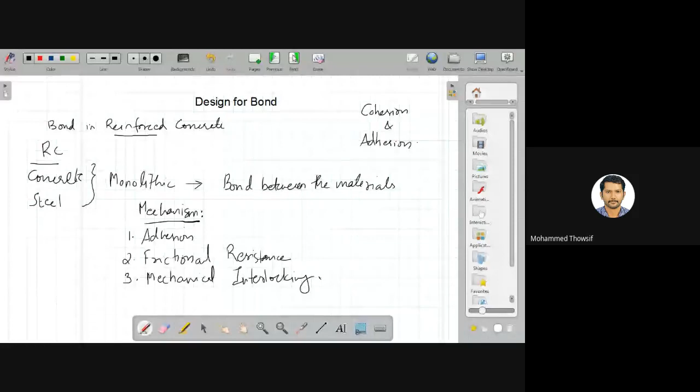So in order to go into the concept more, we will take an example of a cantilever beam. You can see the cantilever beam over here. You are having a fixed support. So this is a fixed end to which your beam is supported, and it is being loaded with WU. I have denoted this as the ultimate load for the beam, and this load considers the self weight also. So this is WU, the design load of the beam.

So if this is the design load, then what will be the variation in bending moment? We shall see. I shall draw it over here. The variation in bending moment. So this will be the maximum value towards the support. This can be marked as MU, and the variation will be parabolic, right? So it will be something like this.

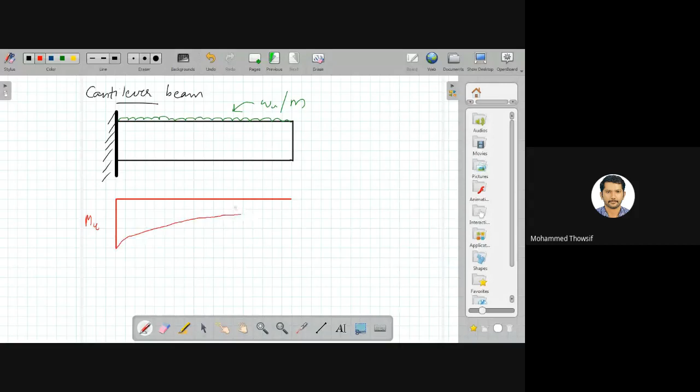And you have a negative reinforcement. The bending moment, or BMD, will be negative, right? So how to provide the reinforcement for this beam, and where will it have the maximum value? Can anyone tell me where it can have the maximum value? Based on which you will be designing, your critical section will be at which location? From the diagram, it is clear to you, right? You'll be having the critical section at... Can anyone prompt me?

Am I audible to you?

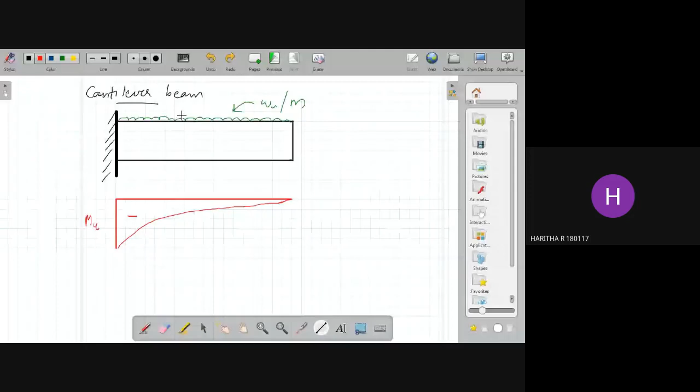Yes, sir. Okay, fine. So where will you be having the critical section for this beam? Critical section means the section for which you need to design. Fixed edge. Pardon? Fixed edge. It was the fixed end, right?

You have the maximum value at the fixed end, so you have to provide the reinforcement like this, right, at the top. So this is your reinforcement, and you can mark it, and this will be your AST, right? You have the AST over here, and that is based on this section. You have the fixed end, based on which you will be designing, and you will be providing a reinforcement of AST.

And let me ask you something. To which side will you be having the maximum tension with respect to the length of the beam? If this is the length of the beam, over this length, will you have the maximum tension for the reinforcement to the free end or to the fixed end? Is it the free end or the fixed end? Definitely, you are having the maximum moment at the support. So towards the fixed end, the reinforcement will be having the maximum tensile force, right?

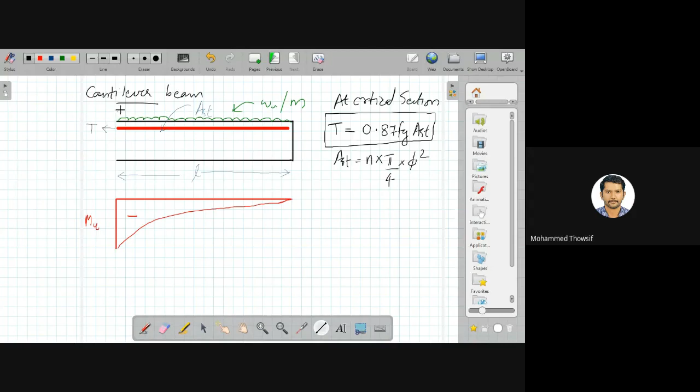Can you imagine what happens if you are restricting the reinforcement up to here? This is your section XX. XX is the critical section, and if you have the reinforcement only up to here, what happens beyond that? You will be having the maximum moment over here, and if you are not providing reinforcement further, the section fails by developing tensile cracks at section XX.

So at section XX, maximum tension is available. Tension develops, and it may fail at that section, right, at that particular location.

So the possible way out is, this beam may be fixed onto a column. So I'm drawing this column over here. And see, you need to take up this tensile force. You have a tensile force over here, so you need to take up that tensile force over here.

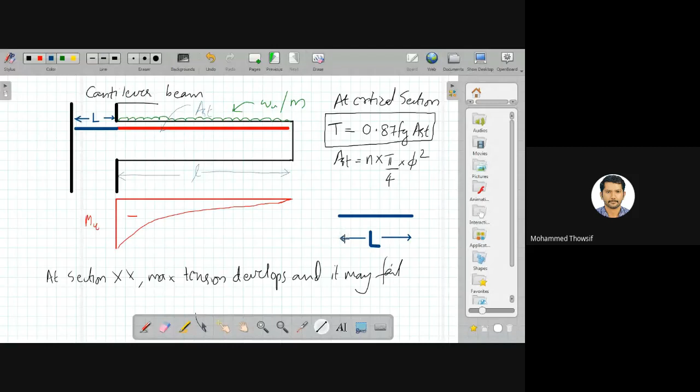I'll take it to the next page. That is better. You have your actual reinforcement. I'm drawing only the reinforcements over here. At the end of this reinforcement, you will be having the maximum tensile force. I'm marking this tensile force over here, right? And the other part, I'm now drawing this L over to this location.

I'm separating it out, right? So this is your L, the length of reinforcement provided beyond the critical section. So you need to resist. If you have a tensile force over here, definitely at this particular location also you'll be having the same tensile force, right? Now this has to be resisted by this particular length.

How is it possible? You are having AST, right? You are having AST over here, and that equals N into π/4 into φ². This is the AST. So your tensile force T equals 0.87 fy into AST. So I am writing AST as N into π/4 into φ². Okay. So that is your T.

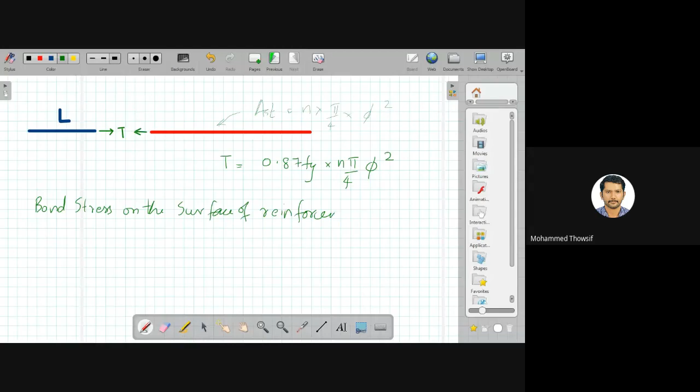This T has to be resisted at this particular location. That is possible by the development of bond stress on the surface of reinforcement. For what length? For a length L. You are having a length L, and you could resist this tension by the development of some stress at this particular location. So that is what I'm going to mark over here. On the surface of reinforcement, it will be developing some stresses like this. I'm marking the stresses which oppose the tensile force T, that occur on the surface of reinforcement.

And this is denoted as tau BD. BD denotes bond. So this is called tau BD. So what will be the force of resistance offered by tau BD over the length L? So the bond equals the anchorage bond. It is otherwise called the anchorage bond. That should be equal to your T. And what is that equal to in terms of the surface force of resistance? You are having a bond stress tau BD, and it acts over some surface area, right?

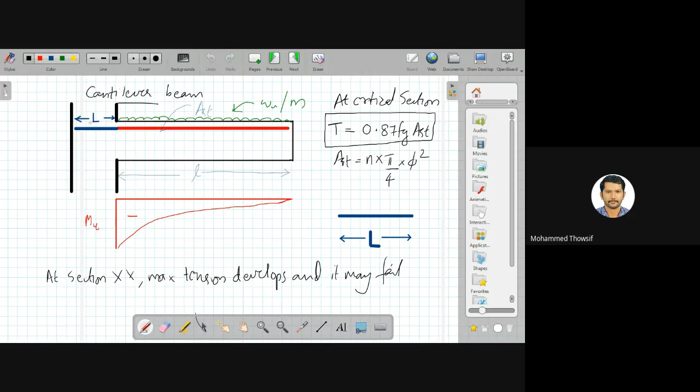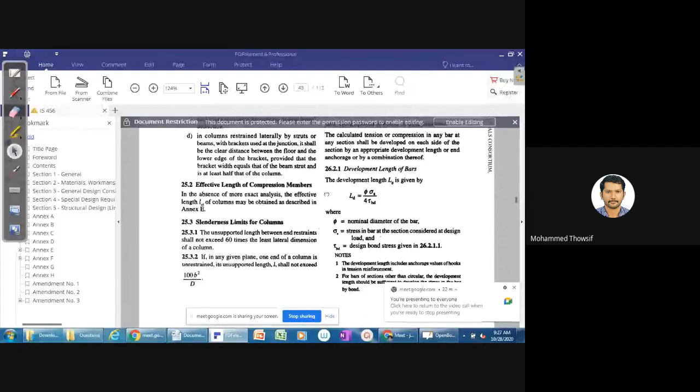So if you are designing the reinforcement, you have to provide some length beyond the critical section for a length LD, and that LD is given by the formula φ sigma S by 4 tau BD. This expression is given in your code also. If you refer back, you have clause 26.2.1, that is in page 42 of your IS 456. You have LD equals φ sigma S by 4 tau BD, where tau BD is the design bond stress, right?

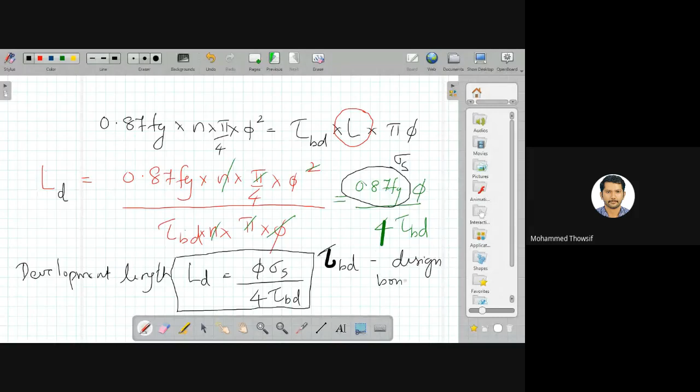So if you come over here, you are having tau BD. That is the design bond strength, right?

See, design bond stress, exactly, and it is given in the next page, that is in page 43. For different grades of concrete, you have different values for tau BD, right? So if you come over here, you have bond. Right. Now you have to talk with respect to the code. See, there's a table over here from which you can see the bond stress, right?

So if you are having deformed bars in tension, this value, if you see, has to be increased by 60%. If you are having HYSD bars as tension reinforcement, you have to increase this tau BD by 60%. And if you are keeping these bars in compression, then the tau BD has to be increased by 25%. Okay.

This could be clearly explained with a numerical. We'll do a numerical now. Okay. So we have a cantilever beam. Please note, we are having a cantilever beam. RC beam, cantilever RC beam. If you need any clarifications, please ask. You can type in the chat box.

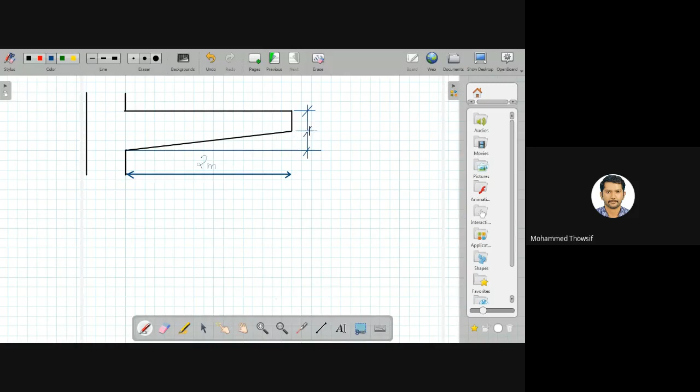This cantilever beam is having a span of 2 meters. It's having a depth of 200 millimeter at the free end, and at this particular location, okay, this is 200 mm. Its B equals 250 mm. Okay. Sorry, width will be 200. It's not 250, it's 200.

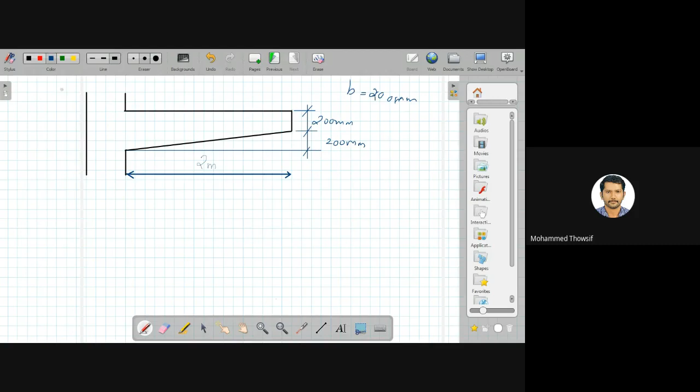And it is being reinforced with bars. This is two numbers of 25 mm diameter, and towards the compression side it is having two numbers of 16 mm diameter. Right. Having two numbers of 25 mm diameter as tension reinforcement, and two numbers of 16 mm diameter as compression reinforcement. It's being provided with these reinforcements.

It's having a design load of 50 kilonewton per meter. Mu is 100 kilonewton meter. This is at the fixed end. At the fixed end, you have an ultimate bending moment of 100 kilonewton meter.

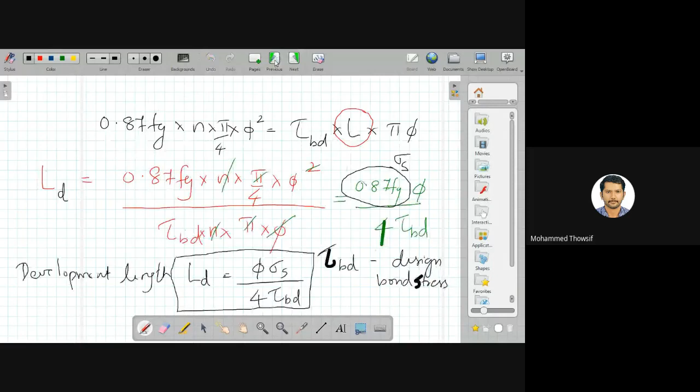So over here, I have to give you two more data. That is, please note that the Ast required is 936 mm square.

And ASC required for this given beam is 266 mm square. So I am giving you these two data, based on which you may have a difference for the development length to be provided.

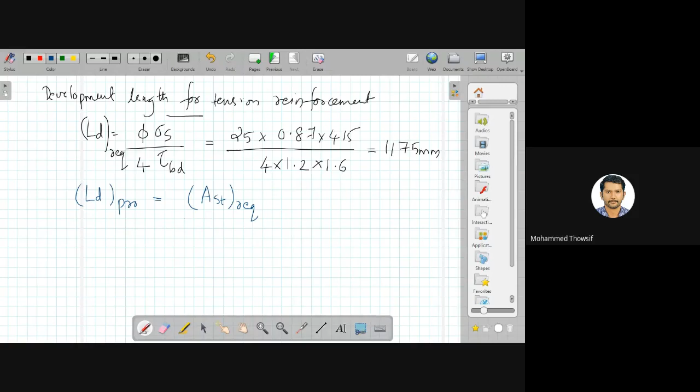So the development length to be provided, LD provided equals, you have to note this formula, that is depending upon the ratio of AST required and AST provided, you can adjust the development length to be provided. Right. Your LD required is 1175. Your AST required is 936. What is your AST provided?

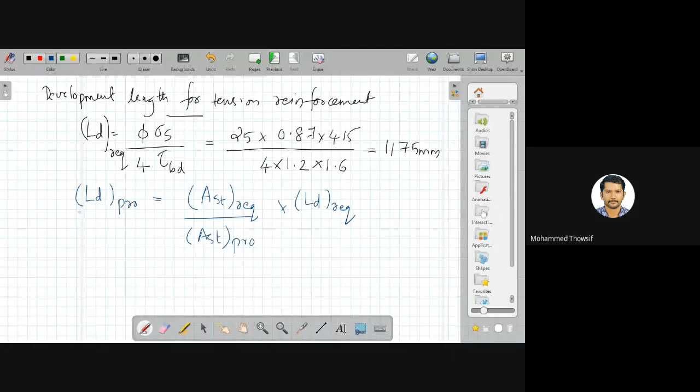What is the AST provided? It is two number of 25 mm bars, right? And that equals 981 exactly. So you can take it as 982 mm square. So now what is your LD provided? That will be 936 by 982 into 1175, right? And that will be equal to 1120. So you have to provide a length of 1120 mm.

Okay. Now you have a next question. How to provide development length? So that is a question to you. If you are having space to extend the bar, you can extend it. Do you have a space over here? I'm taking this distance as 450 millimeters. You are having a column over here, and this distance is 450 mm. Can I provide 1120 over here as a straight bar? Is it possible? Can I provide it?

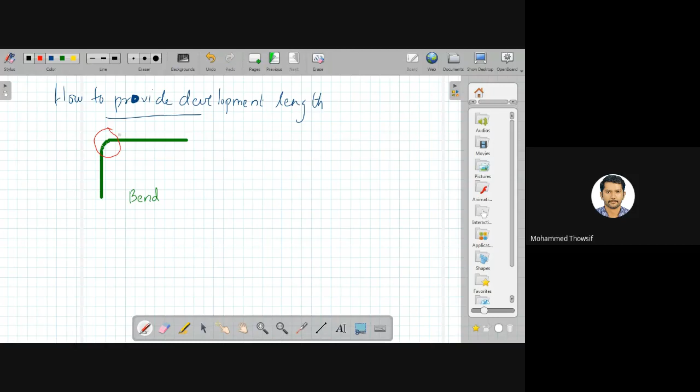And whatever you have over here, the LD is equivalent to, for 45-degree bend, 4 times the diameter. If you are having a 90-degree bend, it will be 8 times diameter. This is for a 90-degree bend. So in this case, the bend equals 8 into 25, and that is equivalent to 200 millimeters.

So if you are providing a bend over here, it is equivalent to 200 millimeters. So 380 plus 200, that equals 580. And what is the remaining? 1120 minus 580. So remaining 540 shall be provided as a straight portion. Right. And this length will be equal to 540.

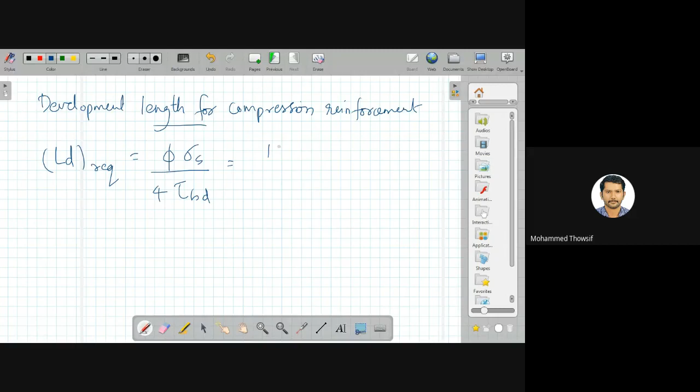Now you have to provide the development length, so what is that LD equal to? What is LD required? Phi sigma S by 4 tau BD again. What is your phi over here now? It is 2 number of 16 mm bars, so your phi is 16. What is your sigma S? It is 0.87 into Fy, by 4. What is your tau BD? Tau BD is again 1.2.

But if it is a bar in compression, you have to increase it by how much? You have to increase it by 25%. Right. You have to take a note that your bar is...

Hello, am I audible to you? Are you there? Getting me? Hello. Yes, sir. Okay, fine.

So if your bar is in compression and if your bar is HYSD bar, first of all your bar is HYSD bar, so you can increase its bond value by 60%. Again, if your bar is in compression, you have to increase it by 25%. So what will be the tau BD in this case? Your tau BD will be 1.2 into 1.6 into 1.25. So that equals how much?

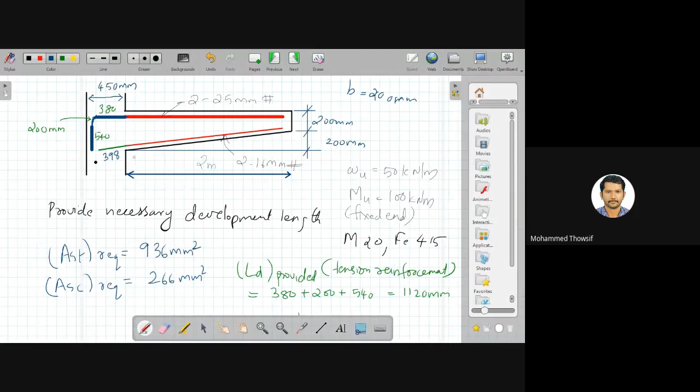If you need to provide in this beam, you can provide it the other way. Instead of providing a bend, that is in the case of compression, in the case of tension reinforcement you can provide it like this. You have provided a length of 380, right? Then you can provide a 180-degree bend. That is called a hook. Hook is something like this. So you can provide it like a hook.

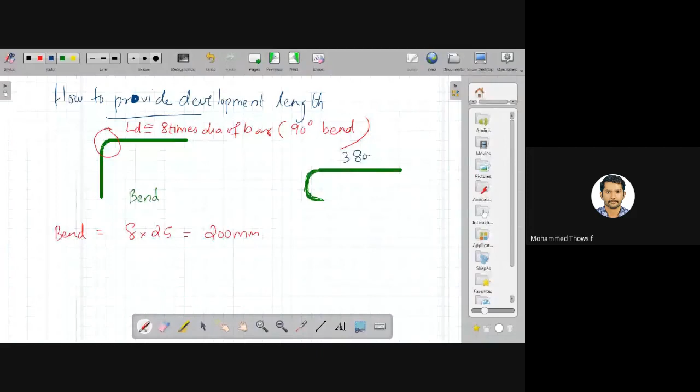So over there you have provided 380 mm. Then this corresponds to how much? For every 45 degrees it could be taken as four times the diameter. This is a 180 degree bend, called a hook. So this corresponds to 16 times the bar diameter, right? So this itself equals 400 mm.

And the remaining length has to be provided. What is the remaining length? That is 1120 minus 380 minus 400. So you need to provide the remaining 340 as a straight bar beyond this. So this is the remaining 340. So 380 plus 400 plus 340 corresponds to 1120.

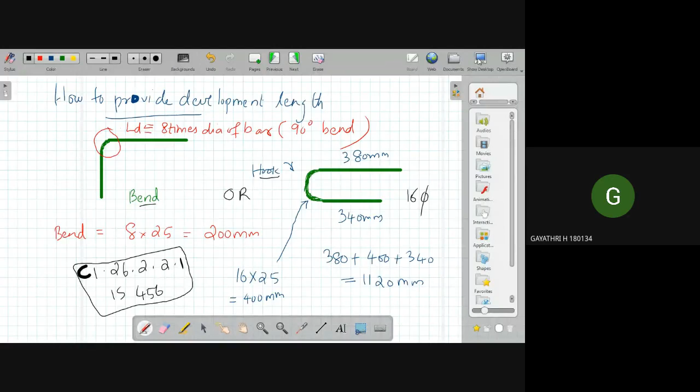Sir, yes. Okay, hello. Sir, can you explain the tau BD? Tau BD, sir. That 25 percentage increase. I hope you understood the equation.

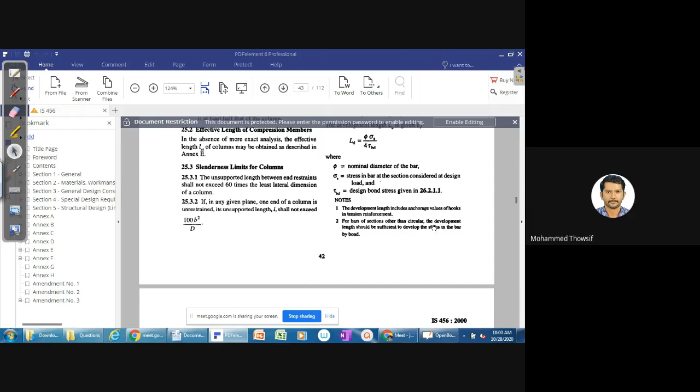LD equals phi sigma s by 4 tau BD. Right. So the value of tau BD will have to be taken from this table that is given in page 43 of IS 456. Depending upon the grade of concrete, the design bond stress will be varying. Is that fine? Yes, sir.

Now, what is the variation from this? If you are using a deformed bar, an HYSD bar, high yield strength deformed bar, your FE415 as well as FE500 are high yield strength deformed bars because they have ribs. Due to the presence of ribs, the design bond stress will be higher.

So, in order to account for that, you have to take 60% extra from the value available in the table. Like 1.2, it has to be increased by 60%, so you multiply it by 1.6 for bar in tension. Irrespective of whether the bar is in tension or compression, you have to increase it by 60%. Understood?

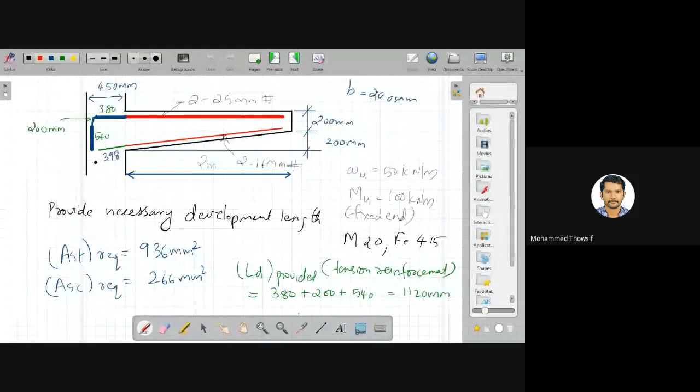Okay, sir. Now, if you are providing the bar in compression, like in this problem, the bottom bar is in compression. For a cantilever, whatever bars we provide at the bottom will be in compression. If that is the case, you have to increase the bond stress by 25%.

So, what we have done over there: you have the value tau BD from the table as 1.2. It is a deformed bar, so we have increased its value by 60%, multiplied it by 1.6. Then the bar is in compression, so you have to increase its bond stress by 25%. That is what is mentioned in the code.

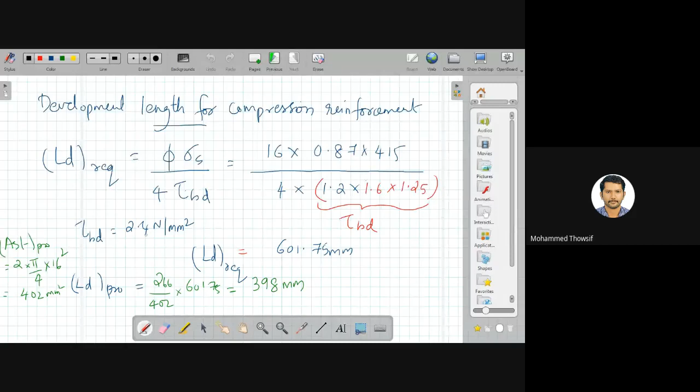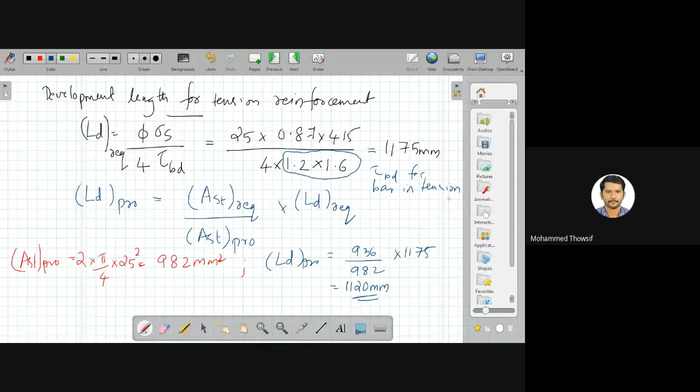We have to multiply it again by 1.25. So we have tau BD as 1.2 into 1.6 into 1.25, which equals 2.4. But in the previous case, it is a bar in tension, so we had to multiply only by 1.6. This is the tau BD for bars in tension. Is that fine? Yes, sir.

Now I'm going to take you to another portion. If you go back into the code, there is something called curtailment of tension reinforcement in flexural members. That's what we are going to discuss next.

So if you take a beam, for example, a simply supported beam, imagine that it is being supported on a wall. It will be having some load acting upon it, W per meter. We'll have a look into its bending moment diagram.

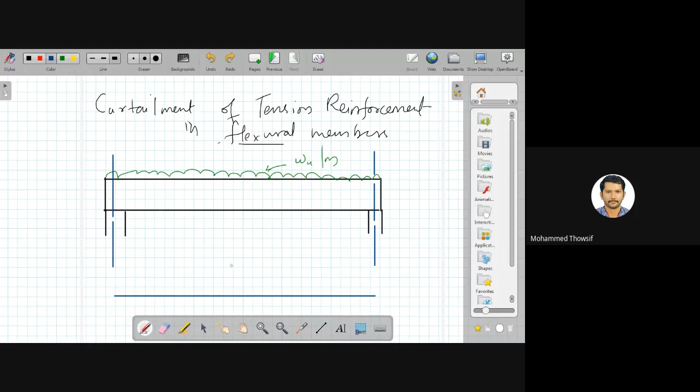I'll mark the center of support. This bending moment diagram will be something like this. It will have a maximum towards the center, at this particular location, the midpoint. This is its end.

So you can design for a Mu and provide the reinforcement throughout. This will be your AST based on the Mu that is calculated. But let me ask you something: is this AST really required for the entire length of the beam?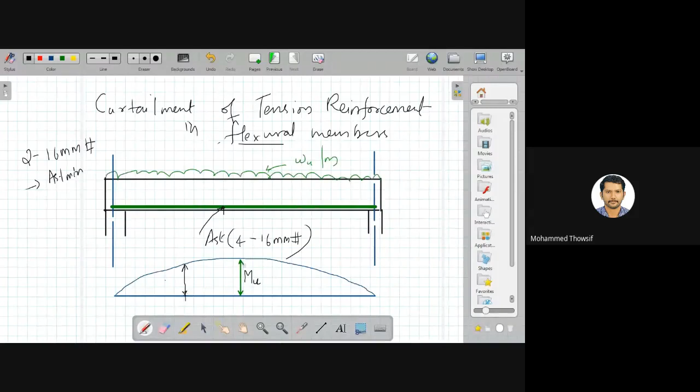This much reinforcement may be required throughout, but at some particular location you can avoid the rest. We'll take it as Mu2. That value will be there on either side of your beam. Corresponding to these locations, I am drawing the section.

Beyond this section, that is, I'm marking it as x, or we'll mark it as y, that will be fine. Y, and y. Beyond this, as per MU2, you may have to provide only the minimum reinforcement. So beyond this, you can curtail the reinforcement, right? This will be 2 numbers 16 hash, right? This could be 2 numbers 16 hash.

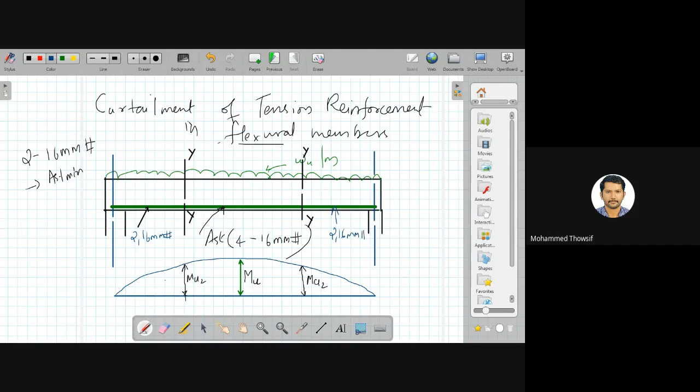Here also you need to provide only 2 numbers 16 hash, right? But over here you need 4 numbers 16 hash. So whether you could stop it over here. That means if you are providing the bar, whether you could stop it over here. For example, you are having all the 4 bars over here.

You will lay the 4 bars up to here, right? So you are having the 4 bars over here. The remaining 2 bars will be available over here, right? So what you could do is you can curtail it at this location, okay? But actually we won't be able to curtail it at this location, because this is your critical section up to which you need 4 numbers of 16 bars, right? You need 4 numbers of 16 bars up to this location.

So what do you have to do? You can't curtail it over here, but what you have to do is you have to extend this bar to some length, and then you have to curtail it. Okay, you have to curtail it, right? So what will be this additional length? Can you tell me?

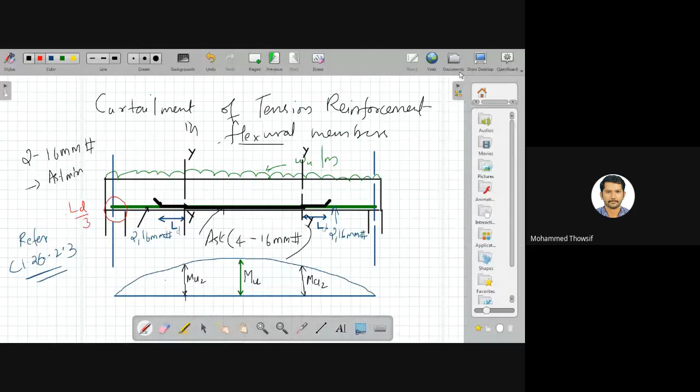Okay, at this particular location, 1/3 of the reinforcement has to be taken for a distance of LD by 3 beyond the support, right, shall extend along the same face of the member into the support to a length equal to LD by 3. When a flexural member is a part of a primary lateral load resisting system, the reinforcements required to be extended into the support as described in A shall be anchored to develop its design stress in tension at the face of the support.

And V is the shear force at the section due to design load. L naught is the sum of anchorage beyond the center of support and the equivalent anchorage value of any hook or mechanical anchorage at simple support and at point of inflection. L0 is limited to the effective depth of member or 12 phi, whichever is greater. Your L0 should be D or 12 phi, whichever is greater.

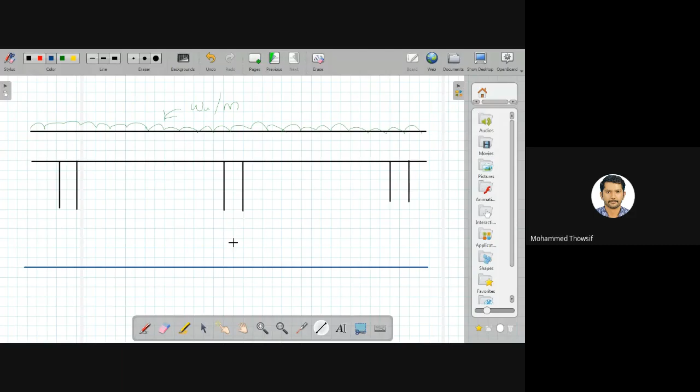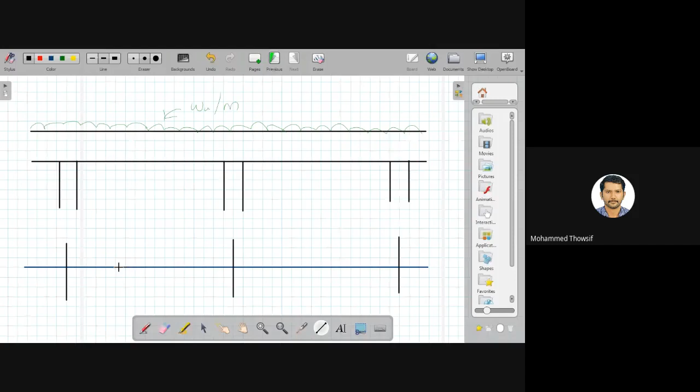These are the support locations. Your bending moment diagram will be something like this. You will be having positive value at the midspan and a negative value towards the support. So you have your diagram like this.

Alright. So you have the positive value, you have the negative value, like this, right? This is the BMD. So what are the points of inflection? You have the points of inflection over here. This is a point of inflection, this is a point of inflection, this is another, and this is another point of inflection.

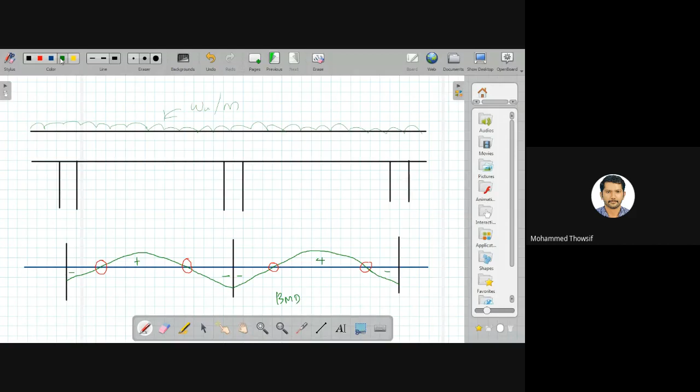So you can provide the reinforcement like this throughout. But at these particular locations, you can restrict it, right? This is one location. This is another location. So these are the midspan.

Over here you need to provide your total reinforcement, that is four number 16 mm bars will be provided to this region. So beyond this line, you need to curtail your reinforcement. So what is the length that is to be provided? That is what you need to compute.

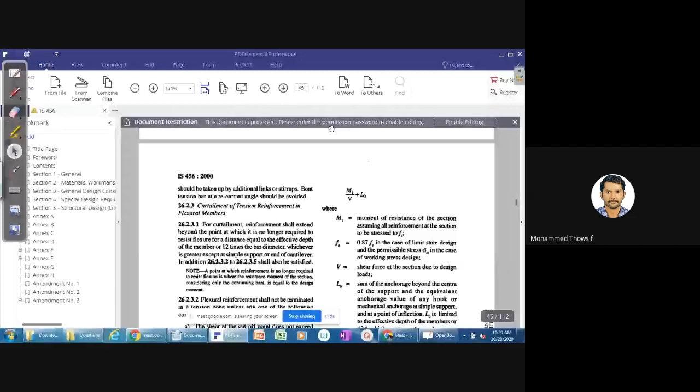Now you have to check for this. You have seen the expression in your curtailment, right? For positive moment reinforcement, as per point 3, your LD should not exceed M1 by V plus L naught. So your LD should not be greater than M1 by V plus L naught. So what is your M1? You need to find M1. We shall see the computation for M1 as well as V.

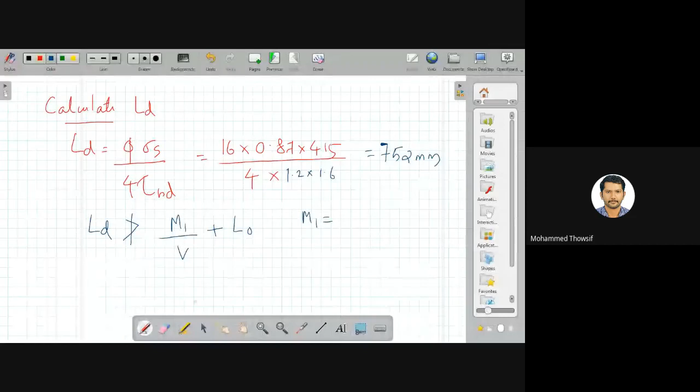Is the V given to you? Yes, your V is already given. It is subjected to a factored shear force of 300 kilonewton. So V is known to you: V is 300 kilonewton. Now what is M1? Your AST is 4 number 16 mm bars, right? So what is that equal to? 4 into pi by 4 into 16 square. Can anyone give me the value for that?

804, right? So that is 804 mm square. Agreed. So what is mu corresponding to this AST equal to 804 mm square? Can you find it out? Your B is given to you as 300 and D is 500. Okay, your B is 300, D is 500. So what is your mu?

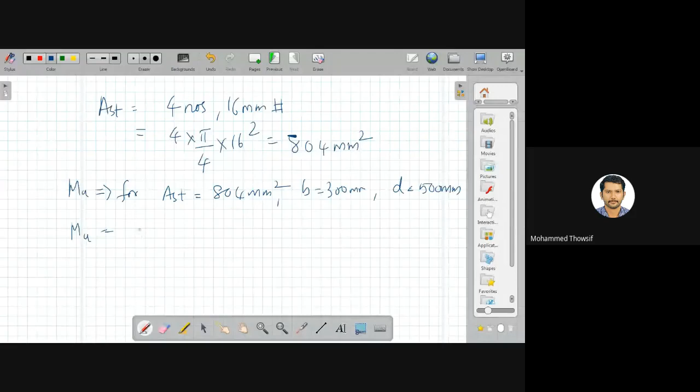Please find mu. You can use the formula given in your code, that is in Annex G. You'll be having some formula over there. You can use this formula: Mu equals 0.87 Fy AST into D into 1 minus AST Fy by B D Fck. Please find out and get me the value for mu. That is Annex G.

From Annex G. Please let me know the value. And that will be equal to M1. Your M1 equals 128.99. So you can take it as 129 kilonewton meter.

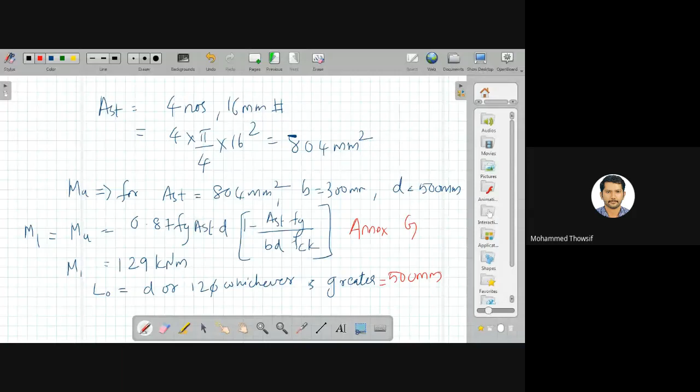So your LD: M1 by V plus L naught, that is 129 by 300 plus 500. See, you have to take care of your units. This is in kilonewton meter, this is in kilonewtons. So whatever you get, it will be in meter, and this is in millimeter. Okay, so please take a note.

So that equals 430 plus 500 equals 930 mm. The condition is that your LD is not greater than M1 by V plus L naught. Am I right? So condition satisfied. So this is a check that you have to do. So that is the problem. I hope it is clear to you. If you have any queries, please ask.

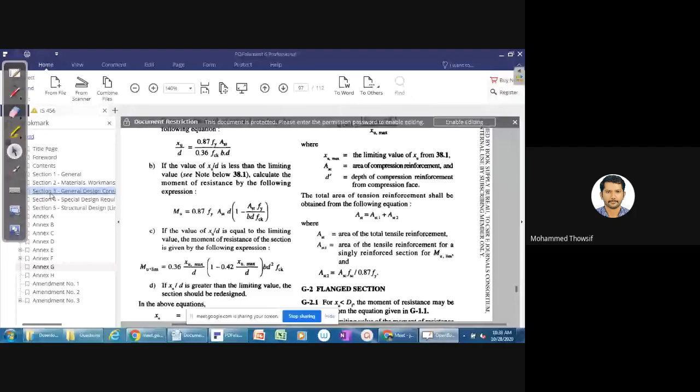I need to clarify one thing. Over here I was telling that you have to take care of this one. The value of M1 by V in the above expression may be increased by 30% when the ends of reinforcement are confined by compressive reaction. So that's what I was explaining.

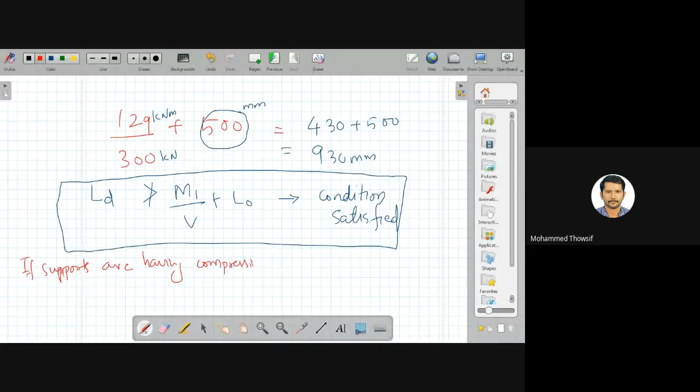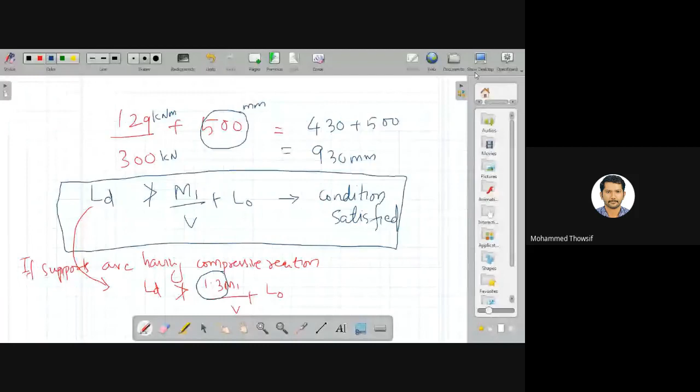If supports are having compressive reaction, this expression will become like this: LD should not be greater than 1.3 M1 by V plus L naught. So you have to include a factor of 1.3. That's what it means. So please take a note of this. Value of M1 by V may be increased by 30% when ends of the reinforcement are confined by compressive reaction.

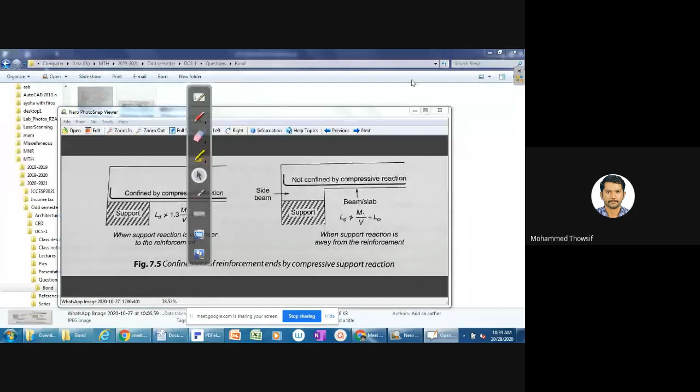I'll show you a figure. This is what I was trying to explain. Please see this. If it is confined by a compressive reaction, if the support is something like this, your LD should not be greater than 1.3 M1 by V plus L naught. If it is not confined, that is, if the reinforcement is at a higher level from the support, then your LD should not be greater than M1 by V plus L naught. Is that fine? Am I clear to you?

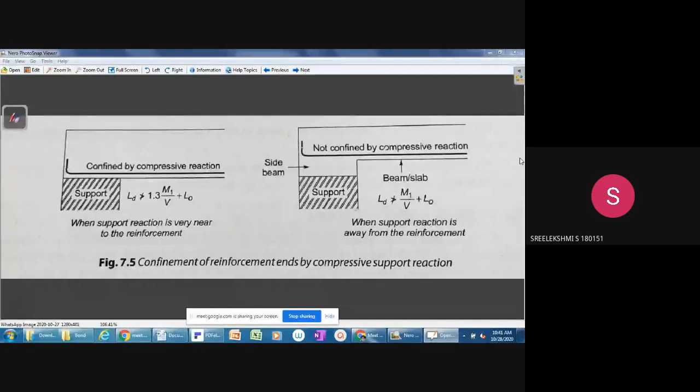I hope it's time for us to stop because it exceeded 10 minutes extra. Right? Shall we stop? Sreelekshmi? Hello, Sreelekshmi? Yes, sir. Are you able to hear me? Yes, sir. Shall we conclude for now?